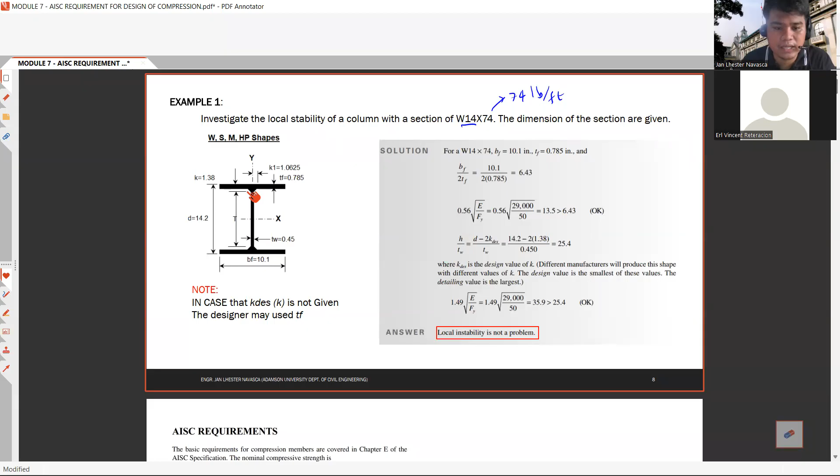Given the dimension of our column, we have a base, the width of the flange to be 10.1, and the total depth of 14.2, thickness of the flange 0.785 inches, and the thickness of the web to be 0.45 inches. And given the fillet K, the fillet distance by the manufacturer, it has 1.38 inches fillet. Fillet is this one, the curve.

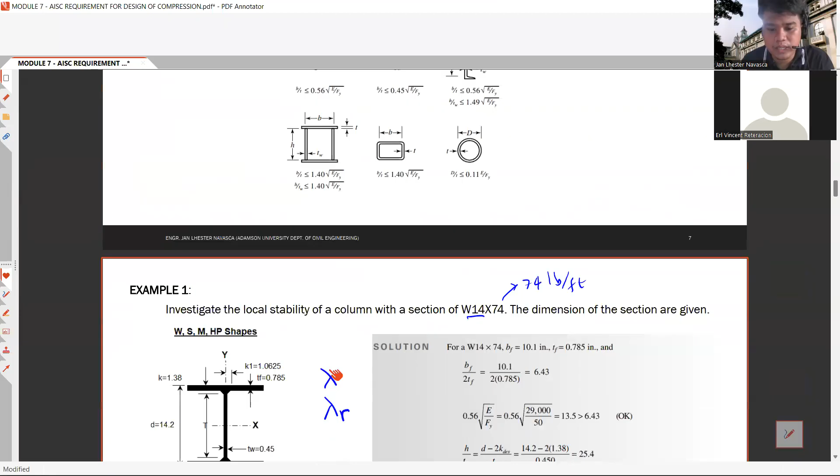So for this type of problem, to investigate if you have local stability of a column, you just need to solve the lambda, or the width to thickness ratio, for the unstiffened and stiffened elements, and the lambda sub r for the stiffened and unstiffened elements. And you will compare that lambda and lambda sub r to come up with your conclusion if you have a slender or non-slender section.

Given we have a W section, or I-beam, we have a summary of the limiting ratio. So we are comparing B over T to 0.56 square root of E over Fy. This is for the unstiffened elements, and for the stiffened elements, H over TW should be less than or equal to 1.49 square root of E over Fy.

So let's plug in all the values. For the W14 by 74 with BF equals 10.1 inches and the flange thickness to be 0.785, according to the formula, that is BF over 2. BF over 2, because this is the total BF and your B is approximately half of that B. This is BF. Therefore, BF over 2 is equals to your B.

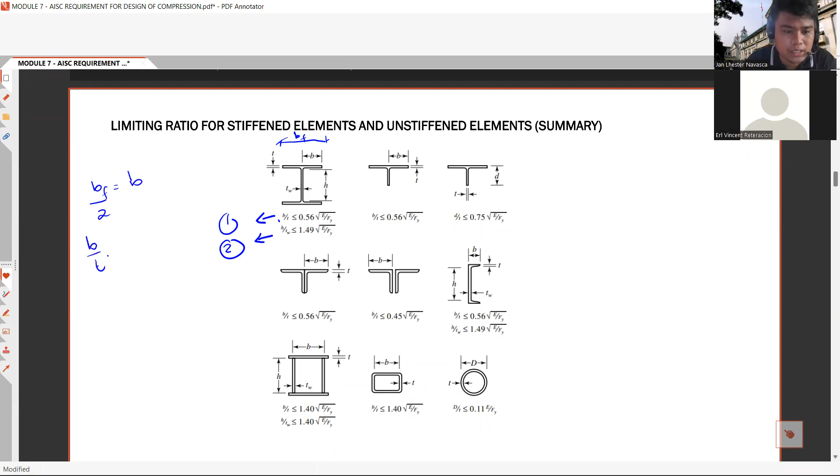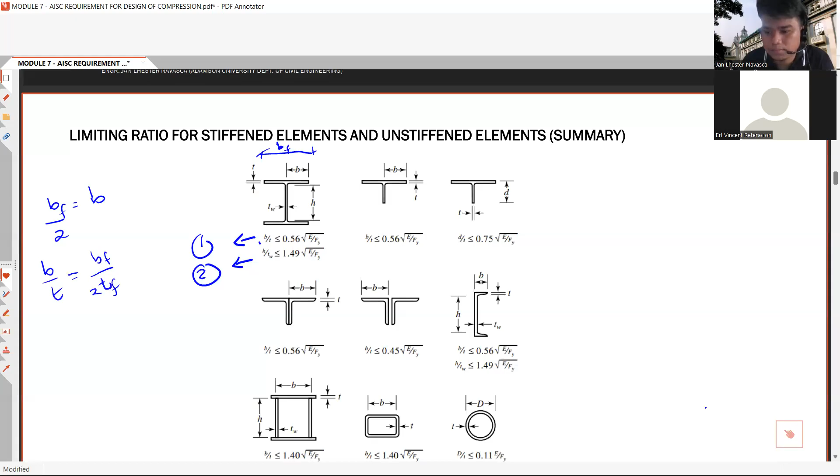Therefore, your B over T is equals to BF over 2 times tF. So we are comparing our width to thickness ratio of BF over 2tF. So just plug in all the values. We have 10.1 over 2 times the flange thickness, we get 6.43.

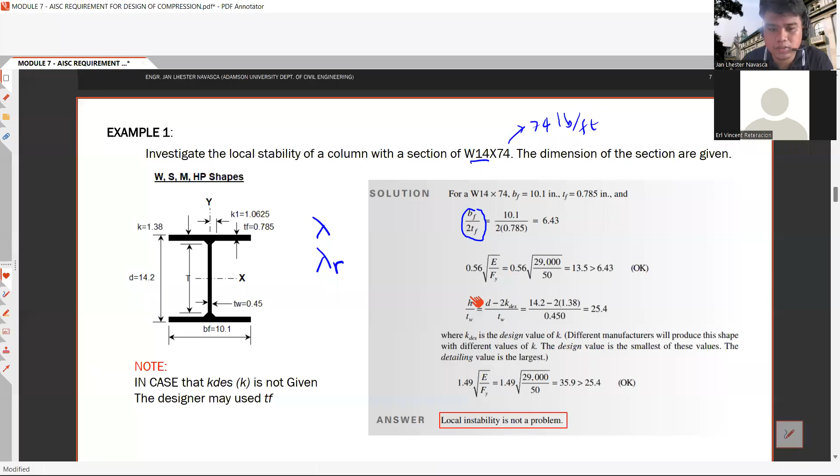Now compare it to the limiting slenderness ratio, the limiting width to thickness ratio, which is 0.56 square root of E over Fy. So solving for 0.56 square root of E over Fy, please memorize the modulus of elasticity of steel in KSI, that is 29,000 KSI.

The problem does not state what Fy to use. The problem is not given the Fy of the column to be used, or the material properties. So let's assume we have the properties, let's say 50 KSI. This is only for this problem, so it's not given.

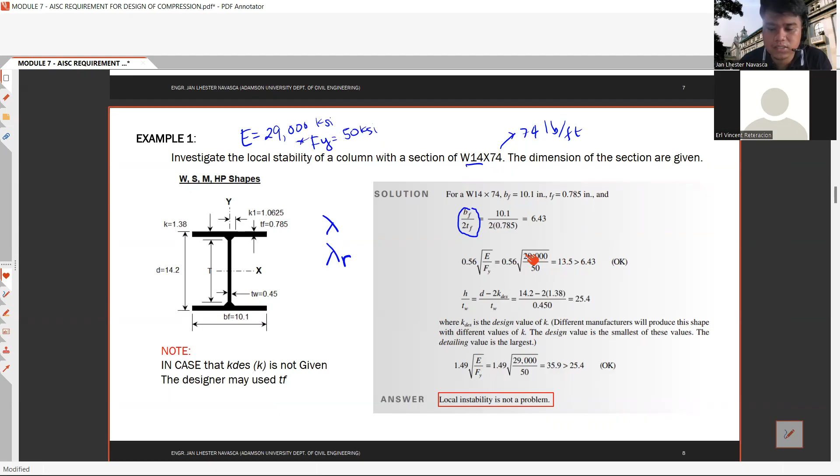Anyway, solving for this limiting width to thickness ratio, we got 13.5, that is square root of 29,000 over 50, that is 13.5. So comparing our limiting width to thickness ratio to the actual width to thickness ratio, that is greater than, meaning that is okay. So therefore, based on the conclusion, we have a non-slender section on the unstiffened element, or on the flange.

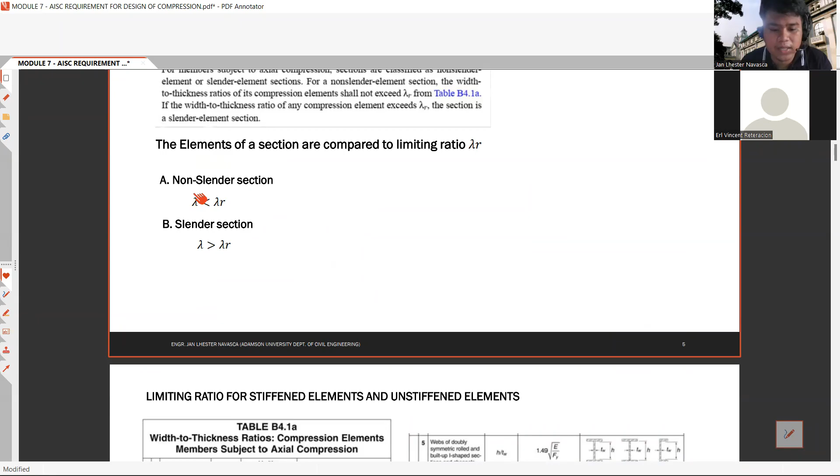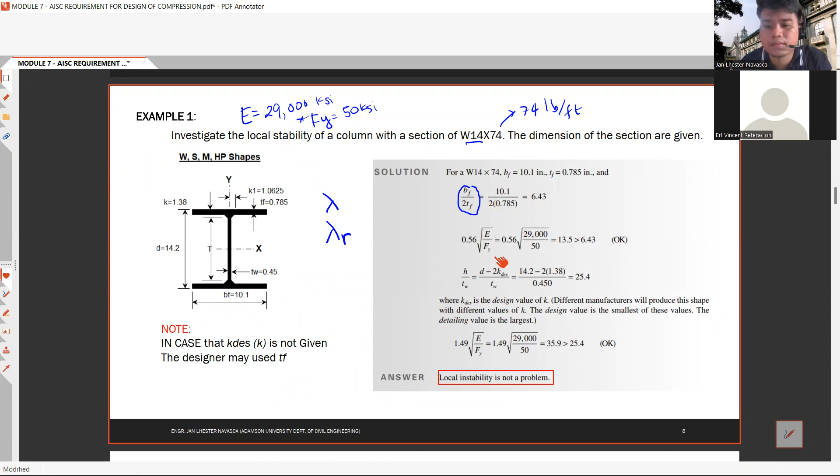And for the case of the stiffened element, for the web. Sorry, this time is for the web, or the stiffened element. So again, let's check the summary.

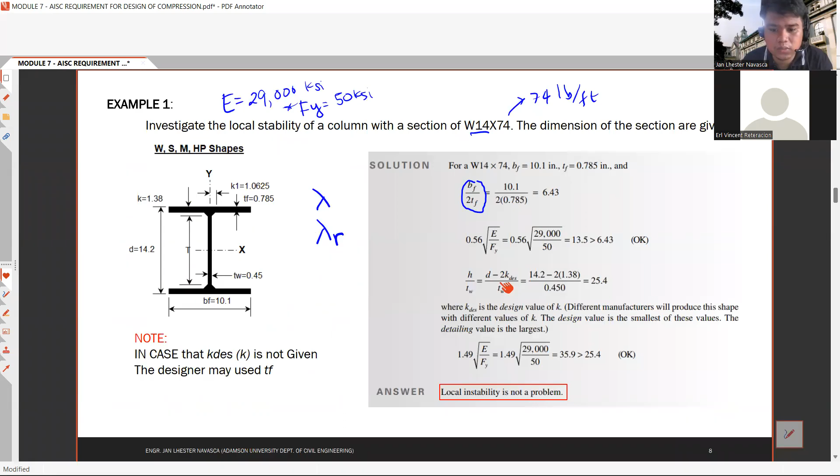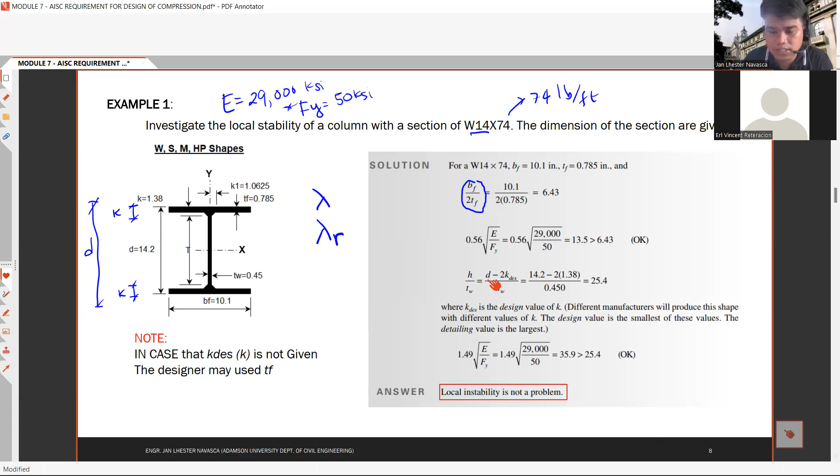According to the summary, your H should be at the end of the fillet. This one, at the end of the fillet, meaning your total depth. To solve for that H, you just need to subtract twice your K design, or the fillet distance. This one, the fillet distance, this is K. You have K here and K also here. Therefore, this is D. Therefore, your H is D minus 2 times K, the fillet distance.

Solving for that, we have 25.4. If the problem does not give the K design value, again, different manufacturers will produce this shape with different values of K. So if K is not given, the designer may use tF. That means you can use H equals D minus 2 times the thickness of the flange, over TW. So if the problem has not given K, use this equation.

Then comparing our width to thickness ratio for the web or for the stiffened elements, solving for the 1.49 square root of E over Fy, we got 35.9. And comparing it to the actual width to thickness ratio, that is greater than, therefore that is okay.

So meaning if your flange or unstiffened element is okay, and for the web you have that is okay, therefore you have no local instability problem, or therefore there is no local buckling that will occur in your column. So that is how you investigate the local stability of a given column.

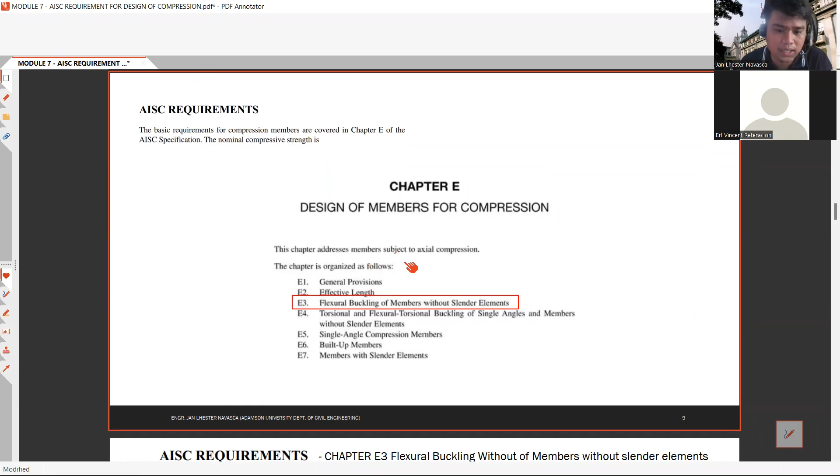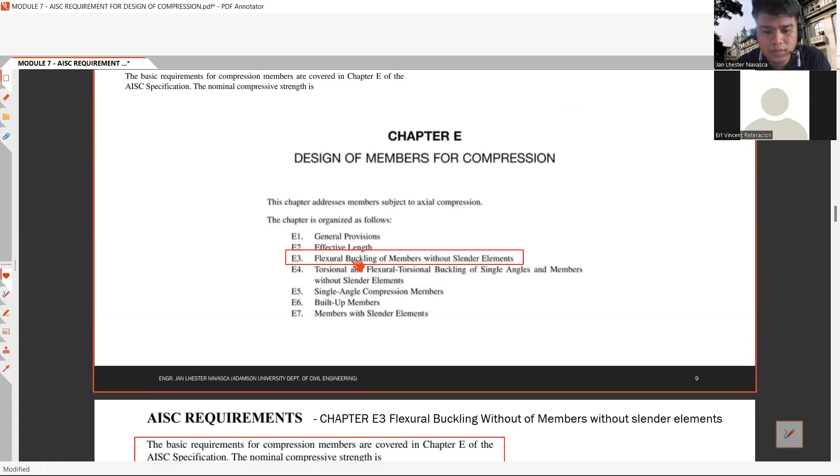So for the AISC requirements, if you check the AISC manual, the basic requirements for compression members are covered in chapter E, design of members for compression. If you check chapter E1 to chapter E7, we have general provisions, effective length, flexural buckling without slender elements, E4, E5, E6, and E7.

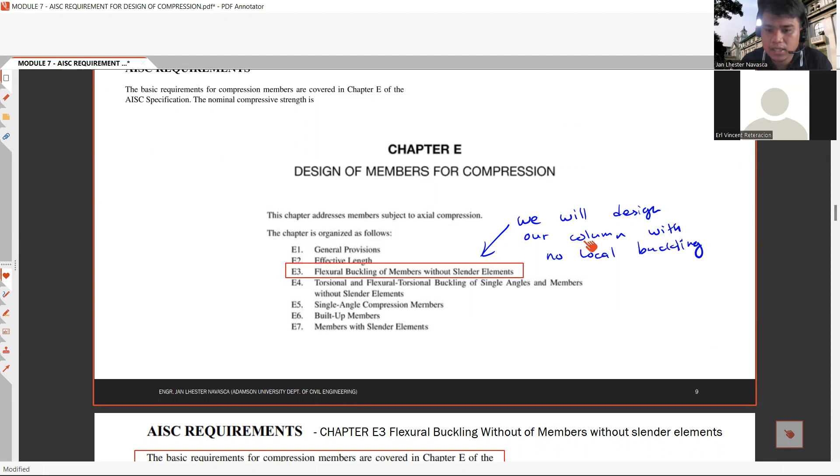Okay, so for the case of our topic now, we will always consider our section to have no slender elements, meaning we will always design our column with no local buckling. So this is our basic assumption for this subject. So therefore we just determine chapter E3, flexural buckling of members without slender elements.

Because if your section, if you chose a section for a column, and the section you picked has slender elements, your section capacity on flexural buckling will decrease. So why would you pick one with slender elements if you can choose a section that has no slender elements, or where there is no local stability problem?

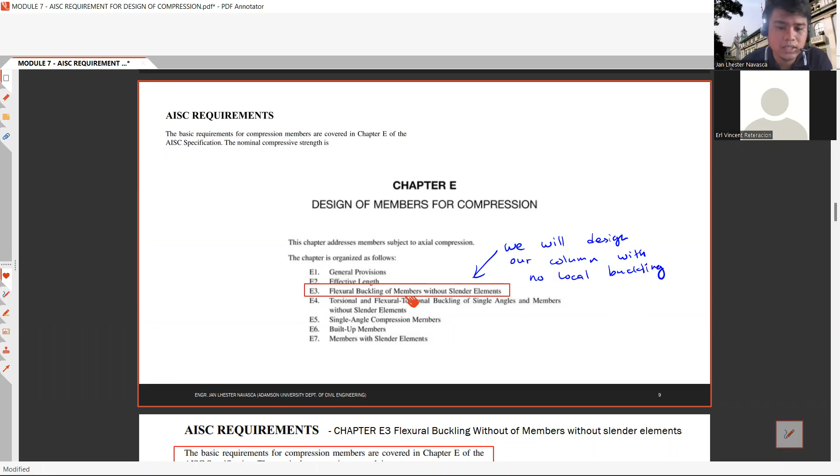So this is the provisions for the section without slender elements. Again, we are only considering flexural buckling. This is the first classification of buckling, or the general buckling. So for the AISC requirements, chapter E3, flexural buckling of members without slender elements.

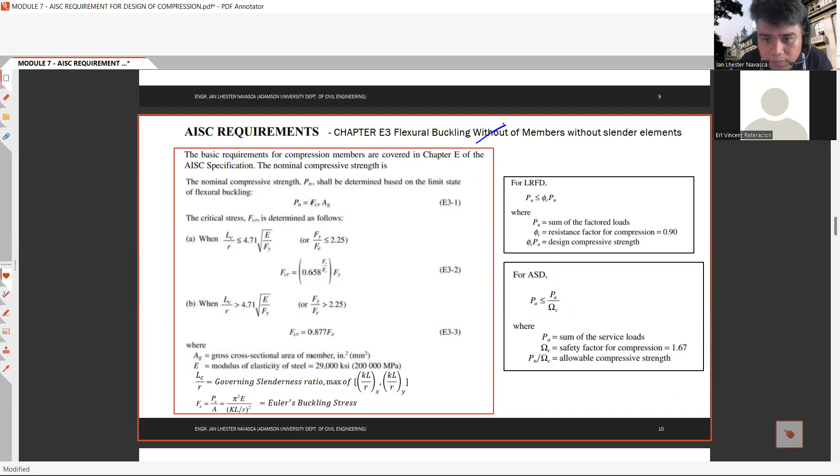It should be buckling of members without slender elements. So the nominal compressive strength Pn shall be determined based on the limit state of flexural buckling, and this equation Pn equals FCR times AG, where your FCR is determined as follows.

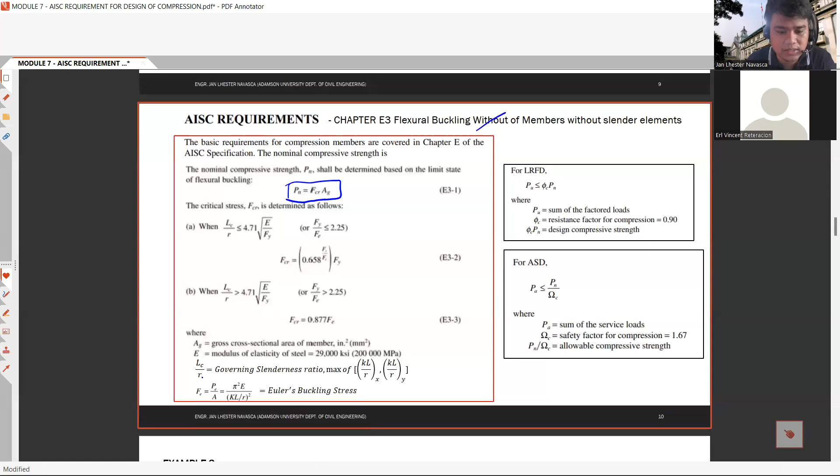Number one, this LC or the governing slenderness ratio, LC over R, different notation. This is LC sub R. LC over R is the governing slenderness ratio or the maximum KL over Rx or KL over Ry, and is less than 4.71 square root of E over Fy.

Your FCR is this one. Then, if your LC over R or the governing slenderness ratio is greater than 4.71 square root of E over Fy, you have this value of FCR.

As I said last meeting, the AISC provisions for designing compression members are based on the assumption of Euler's column. That is why you have this value F sub E. What is that F sub E? That F sub E is the Euler's buckling stress. If you recall the Euler's buckling stress, that is pi squared E over KL over R squared.

Meaning, the AISC requirements now consider the residual stresses. Residual stress is the capability of the steel to carry load even beyond Fy, or beyond the yield limit. So meaning we are designing compression members past the yielding limit state, heading toward the plastic range. So this time your Euler's buckling stress is now included in the formula for FCR.

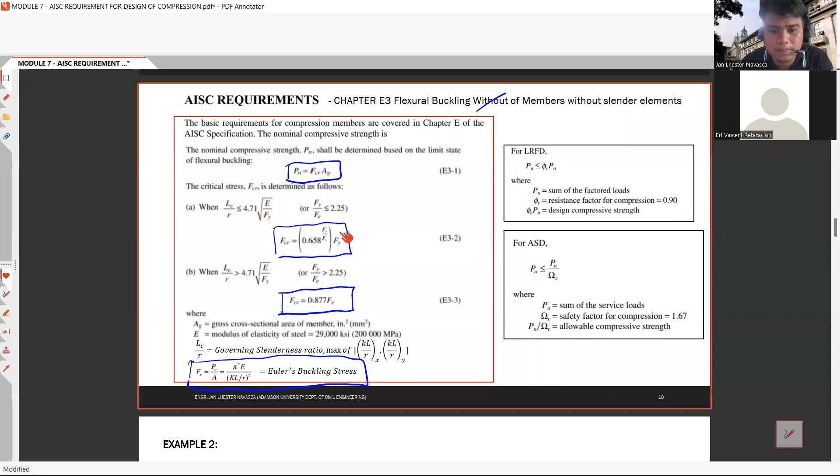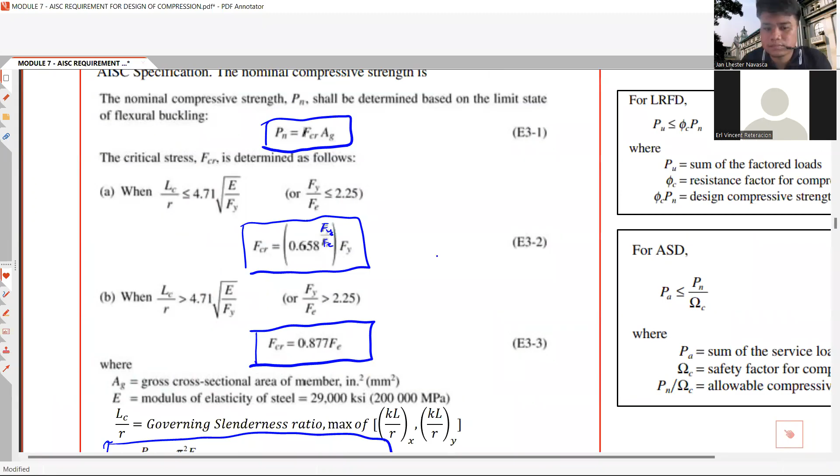Again, this FCR is 0.658 raised to Fy over Fe, multiplied by Fy. This is Fy over Fe. So if that is less than 4.71 square root of E over Fy, you use this; if greater than, you have this 0.877 Fe.

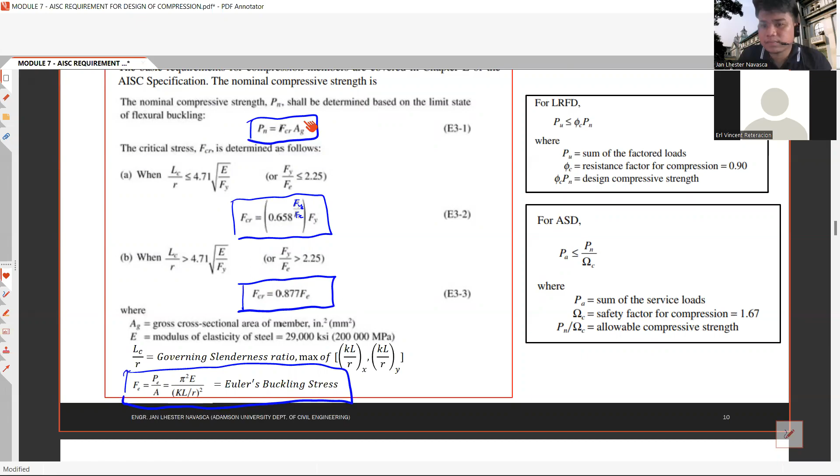Then you multiply that FCR to your gross area, AG, and you will get the nominal compressive strength. So for the design philosophy based on LRFD or ASD, you simply multiply the nominal capacity by a factor: for LRFD, multiply by phi; for ASD, divide by the factor of safety omega.

So for LRFD, the ultimate design compressive strength is phi sub C, Pn, where your phi sub C is the resistance factor for compression, equal to 0.9.

Then for ASD, your safety factor for compression is 1.67. So you will divide that nominal compressive strength by 1.67, and you will get the allowable compressive strength. And that is your capacity, your capacity based on compression.

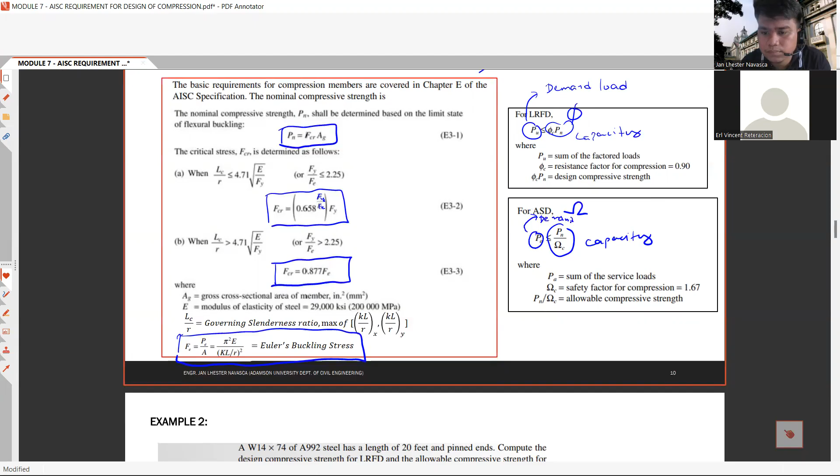Then this one is the demand load, sum of the factored loads, your demand load. So whatever load combination governs, that is your demand load based on the LRFD or ASD load combination.

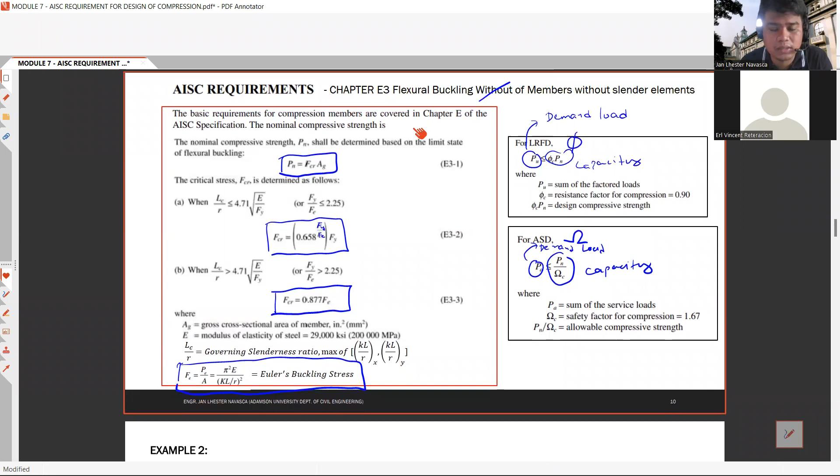So it's very straightforward, this assumption for the AISC requirements for the design of flexural buckling of compression members.

So let's try to solve an example problem. A W14 by 74 of A992 steel has a length of 20 feet.

Your column is pinned at both ends. Compute the design compressive strength for LRFD and the allowable compressive strength for ASD. In other words, we are solving for the capacity of our compression member based on LRFD and based on ASD. Please take note that A992 steel has an Fy of 50 KSI and modulus of elasticity of 29,000 KSI. Given the properties of W14 by 74, the cross-sectional area is 21.8 square inches and radius of gyration on the y-axis is 2.48 inches.

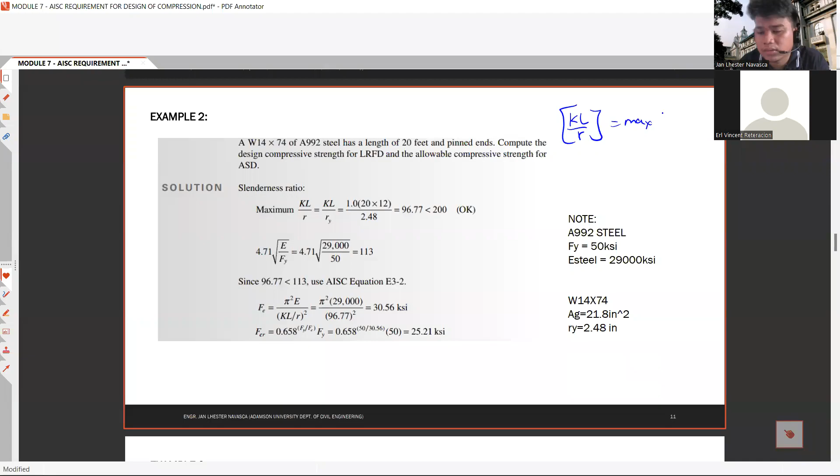Since the governing slenderness ratio KL over R will be compared, it comes from the maximum of KL over Rx and KL over R on the y-axis. This one, KL over R y, on the y-axis.

If you have the same value of K for both, both 1.0. Same value of L, since there's no lateral bracing, that is the same. For X and Y axis, that is 20 feet. So the only thing that will give us a straightforward answer for maximum slenderness ratio is by using the minimum radius of gyration.

Since Ry is lower, the governing slenderness ratio is KL over Ry. So you have K equal to 1.0 since both ends are pinned, and your L is 20 feet, in feet, while Ry is in inches. Therefore you need to convert feet to inches by multiplying by 12. So that is why you have 20 times 12. So 1.0 times 20 times 12 over 2.48 gives you 96.77.

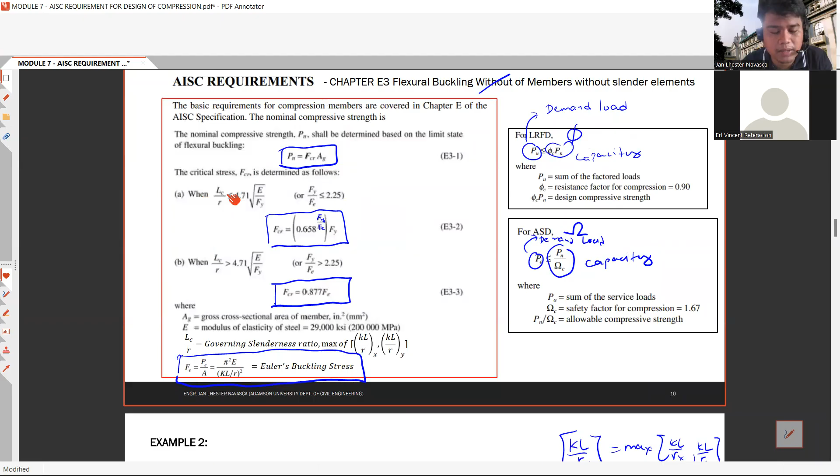Let's use this recommendation, so that is okay. Then based on AISC requirements to solve for the governing flexural buckling strength, you will compare your maximum slenderness ratio to 4.71 square root of E over Fy. Solving for that, 4.71 square root of 29,000 over 50 gives you 113. Now compare 96.77 to 113.

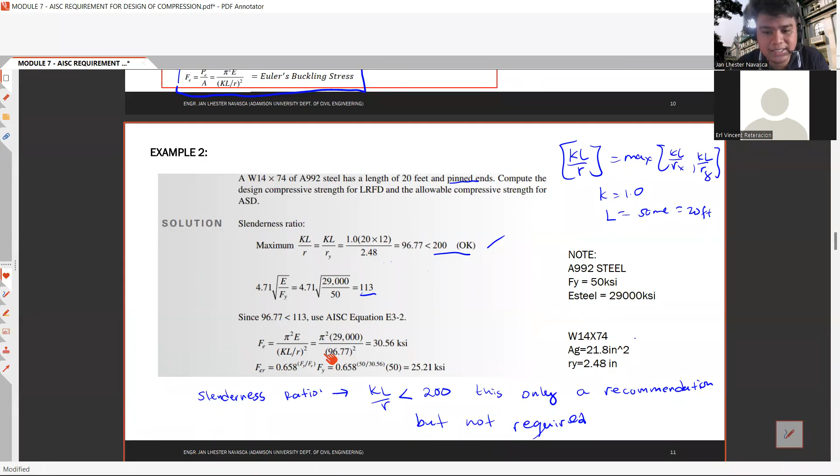Therefore you will use equation E3-2 to solve for FCR. Your FCR equals 0.658 raised to Fy over Fe, multiplied by Fy. To solve for Fe, the Euler's buckling stress, that is pi squared E over KL over R squared, so pi squared times 29,000 over 96.77 squared. You have this Euler's buckling stress to be 30.56 KSI. Now solving for FCR, that is 0.658 raised to Fy over Fe, multiplied by Fy, you get 25.21 KSI. So this time, this is your FCR.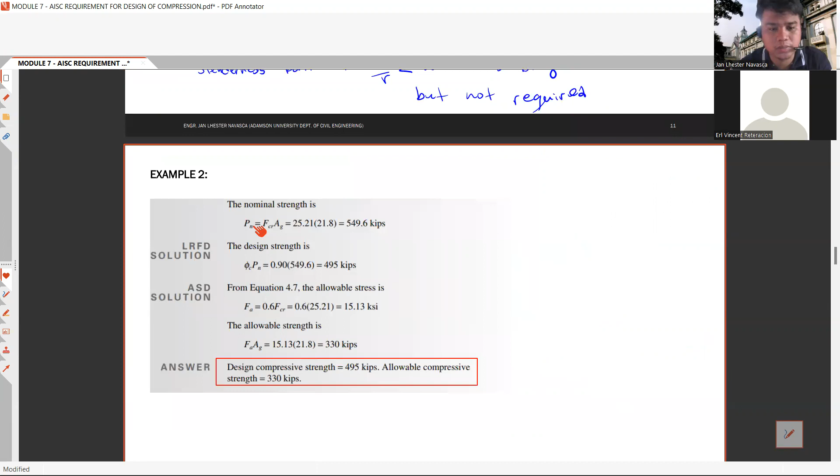You will multiply it by AG to get the nominal compressive strength. So the nominal compressive strength Pn equals FCR times AG. Your FCR is 25.21 and the cross-sectional area of the column is 21.8. Therefore your nominal compressive strength is 549.6 kips.

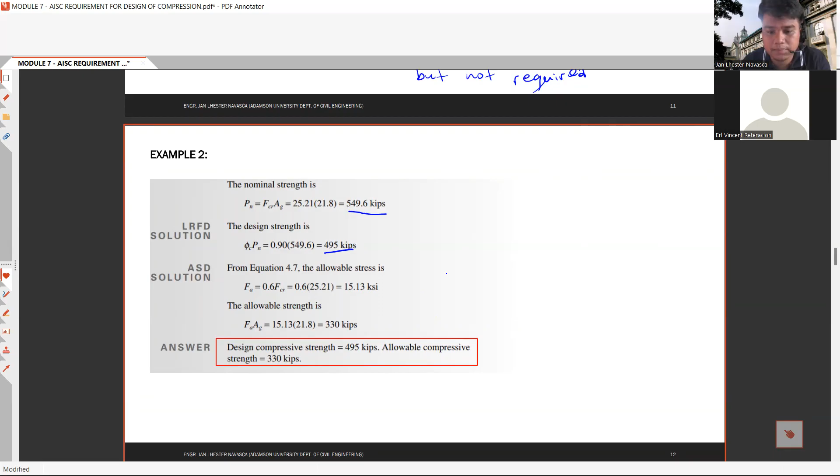The problem is asking for the design strength in LRFD and the allowable strength in ASD. So you multiply this nominal strength by 0.9 to get your design strength in LRFD, giving 495 kips. For the ASD solution, according to the provisions, you divide your nominal compressive strength by the factor of safety for compression, 1.67. P sub A equals P sub N over omega, where omega corresponds to dividing by 1.67. So solve for 1 over 1.67 to get your P sub A.

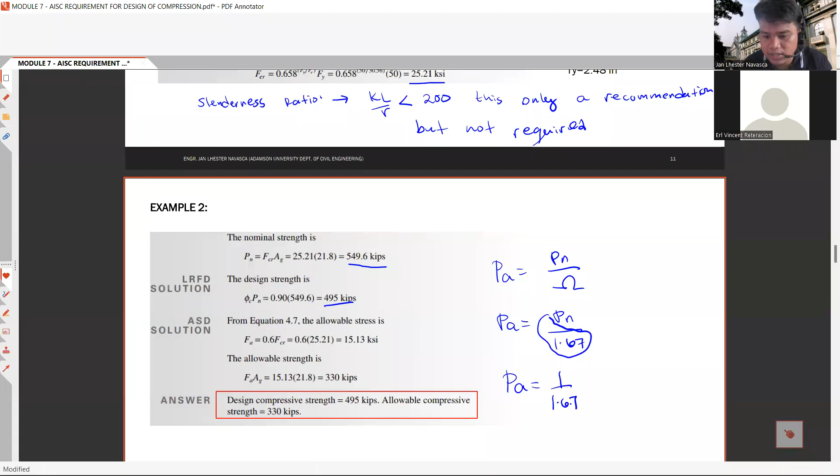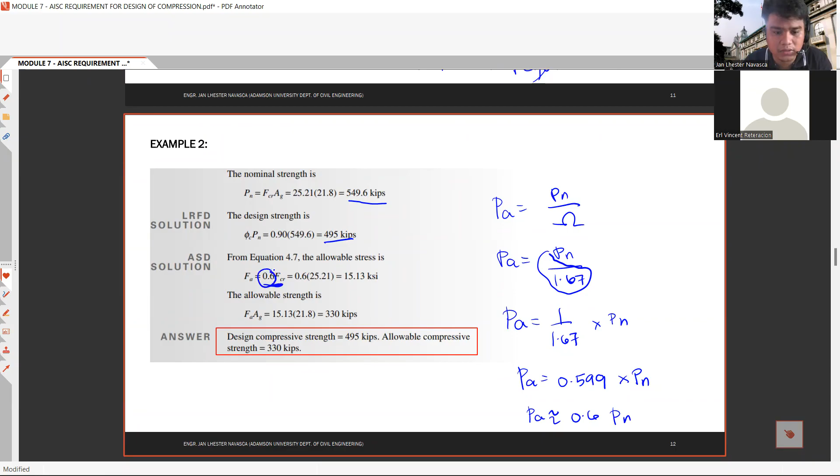So that equals 1 over 1.67 times P sub n. Solving for 1 over 1.67, you have 0.598, 0.599 to be exact, multiplied by P sub n. So that is approximately 0.6 P sub n. That is why some books use this 0.6 factor, instead of dividing by 1.67.

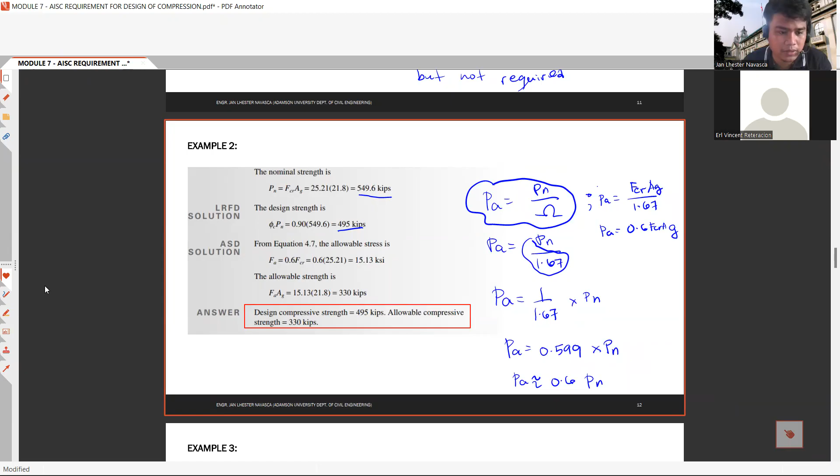So to solve for the allowable stress or allowable strength, you can multiply your F sub A to be 0.6 FCR. You have this 15.13 KSI, and the allowable strength is 330 kips. Or use this equation: P sub A equals P sub n, which is FCR times Ag divided by 1.67, you will also come up to 0.6 FCR Ag. So you can use this one, or you can use this one. They're still the same.

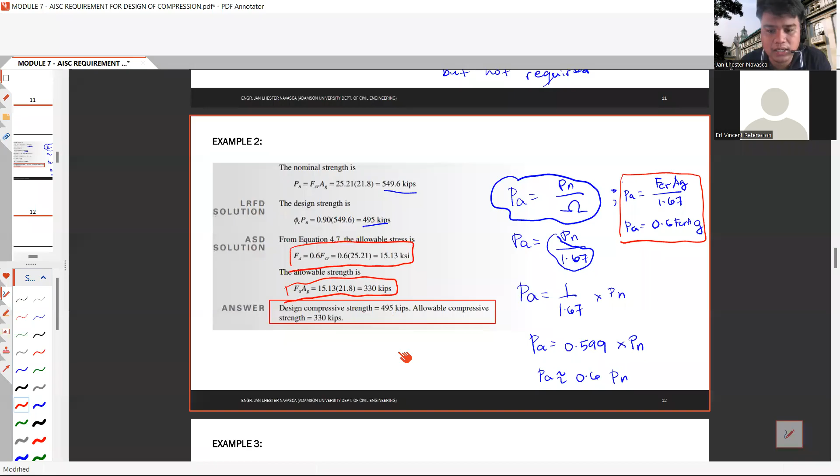So the answer is the design compressive strength in LRFD is 495 kips, and the allowable compressive strength is 330 kips. So that is the flow of solving the capacity of our column based on ASD and LRFD. So, another problem.

Using AISC equation E3-2 or E3-3, we will first determine which equation governs, whether it is E3-2 or E3-3, and determine the nominal axial compressive strength for the following cases: number 1, where L equals 15 feet, and number 2, if L is 20 feet. Note that we are also using A992 steel with Fy equal to 50 KSI, and modulus of elasticity of steel to be 29,000 KSI. The properties of W10 by 33: Ag is 9.71, and R sub Y, the radius of gyration in Y, is 1.94 inches.

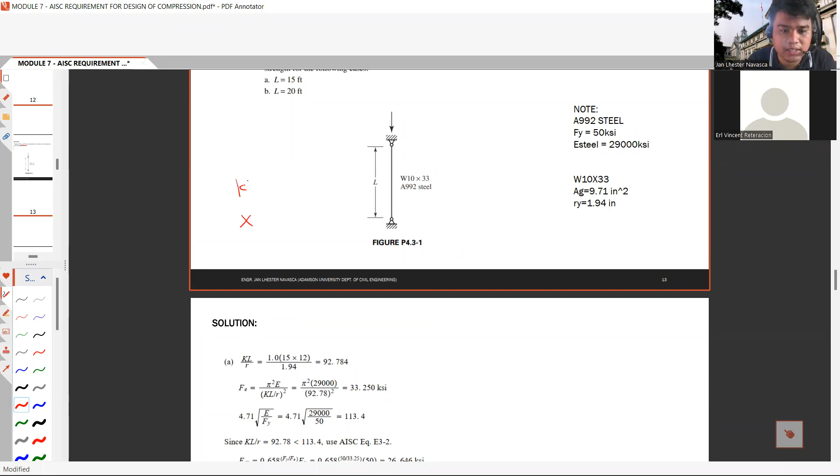Let's try this. For KL over R, the governing slenderness ratio, since you have no lateral stability, in the x-axis your K and L, and in the y-axis your K and L, are the same. Therefore, the only factor in slenderness ratio is based on radius of gyration. So the governing slenderness ratio is KL over Ry in the y-axis. Therefore, your governing slenderness ratio is 1.0 times 15 times 12 over 1.94. Again, your 1.94 is in inches, therefore your L should be in inches, that is why you have this conversion of feet to inches. Then your governing slenderness ratio is 92.784.

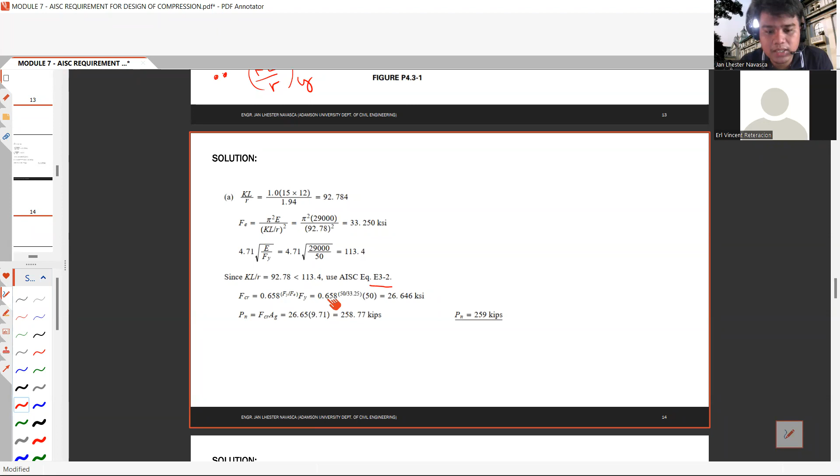Solving for F sub E, let's also solve the Euler's buckling stress: pi squared E over KL over R squared, you have this 33.25 KSI Euler's buckling stress. So now we compare it to 4.71 square root of E over Fy, that is 4.71 square root of 29,000 over 50, you have this 113.4. Since your KL over R, which is 92.78, is less than your 4.71 square root of E over Fy, which is 113.4, therefore we will use equation E3-2 again, since your KL over R is less. So solving for equation E3-2, your FCR is 0.658 raised to Fy over Fe, times Fy. Therefore your FCR is 26.646 KSI.

And solving for the nominal strength, which is P sub n equals FCR times Ag, you have 26.65 times 9.71, which is your Ag, you have this 258.77 kips. So the problem is using whole numbers, so rounding up to a whole number, you have this 259 kips.

Next problem, what if your L is 20 feet? So if our L, which is 20 feet, solving for KL over R again, that's the governing slenderness ratio, you have 123.71. Therefore, your F sub E now will be equal to 18.705 KSI, the Euler's buckling stress, and compare it now to 4.71 square root of E over Fy, you have 113.4. Since our KL over R is greater than the limiting slenderness ratio, which is 4.71 square root of E over Fy, therefore for this length of 20 feet, the capacity is based on equation E3-3 this time, this is what governs.

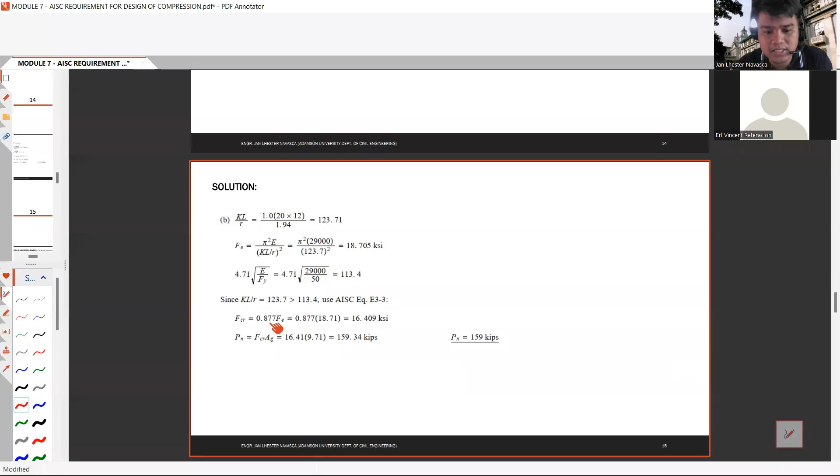According to the problem, your F sub CR or FCR is equal to 0.877 F sub E. So 0.877 multiplied by F sub E, you have 16.409 KSI. Then solving for the nominal strength, you have this 159.34 kips, or that is equivalent to 159 kips.

So what can you say about these two different lengths? Meaning if we increase the length of our column, it doesn't mean that the capacity will also increase. That's not the case, they are inversely proportional. When you increase the length, your column becomes susceptible to buckling, to flexural buckling, meaning its capacity decreases.

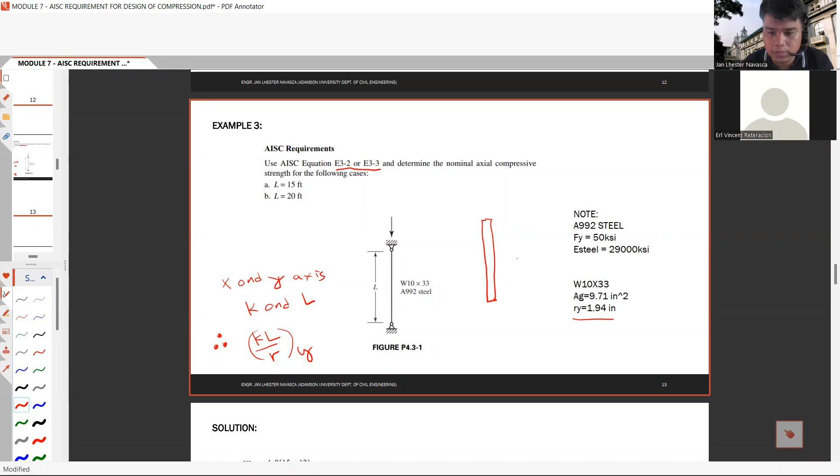Again, if you have a ruler, compare a very long and slender ruler to a ruler that is wide and short. If you apply an axial load, it is easier to buckle the column with a long and slender element, this one, compared to this one. You cannot buckle it easily. So this one is higher compared to this one.

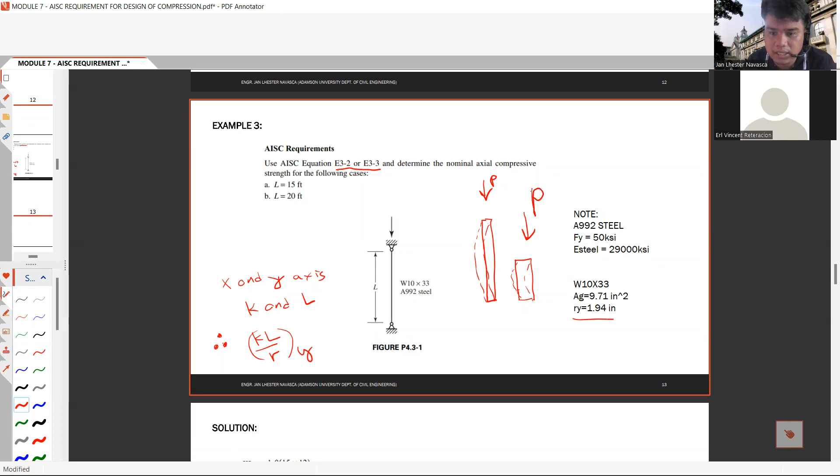Dapat baliktad, it should be this one. Mas maliit lang yung compressive strength, and this time, mas malaki yung compressive strength na kaya mong i-apply. Okay, so that is also the case given by this example problem.

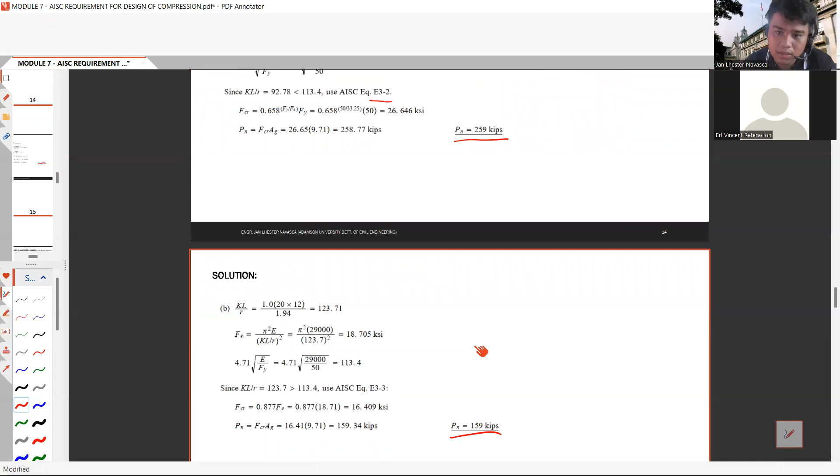So when our L is 15 feet, the nominal capacity is 259 kips. When our L is increased by approximately 30%, which is 20 feet, your capacity will now be 159 kips. So 159 divided by 259, nag-decrease yung capacity natin by 40%.

Okay, imagine, nagdagdag ka lang ng 5 feet. 5 feet is approximately 1.5 meters. So nagdagdag ka ng 1.5 meters on your column, and the capacity of your column is decreased by 40%.

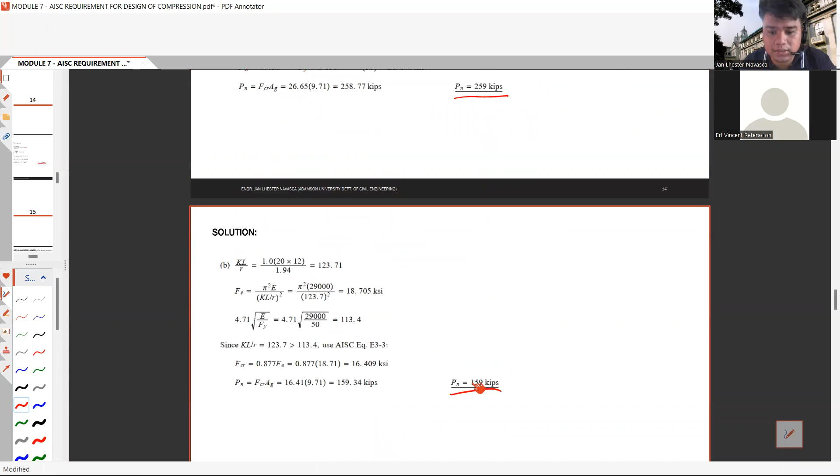Okay, so we also have these AISC tables for design of compression member. If you check your AISC manual and find table 4, the AISC tables for the design of compression members, the manual contains many useful tables for analysis and design. So for compression member whose strength is governed by flexural buckling, that is not local buckling, table 4-22 in part 4 of the manual, design of compression members, can be used.

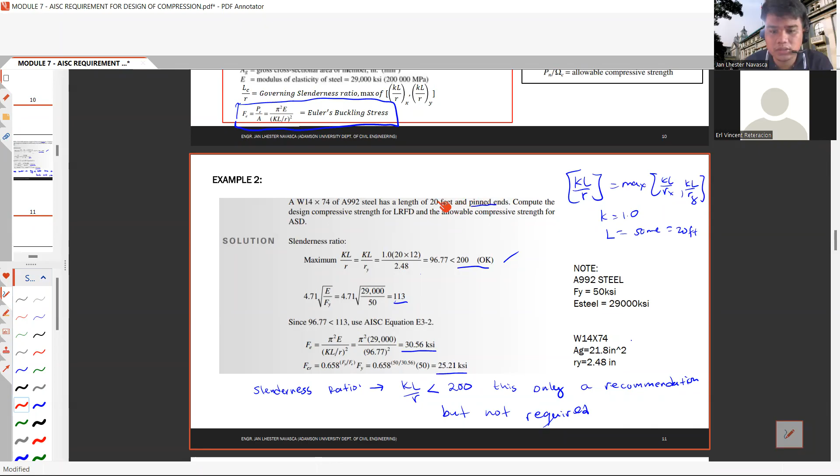Recall in our example 2, your W14 by 74 having an Fy and effective length of 20 feet. Puntahan natin yung example 2. So given dun sa example 2, your K times L is equals to 1.0 times 20. That is their effective length. So therefore your effective length is 20 feet.

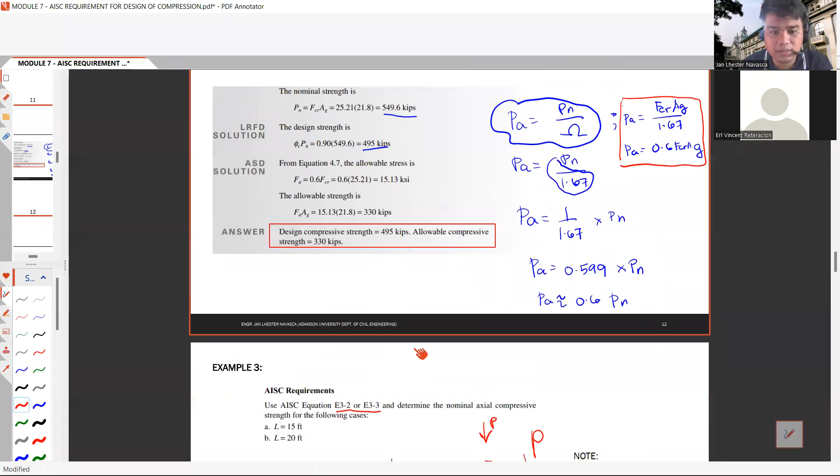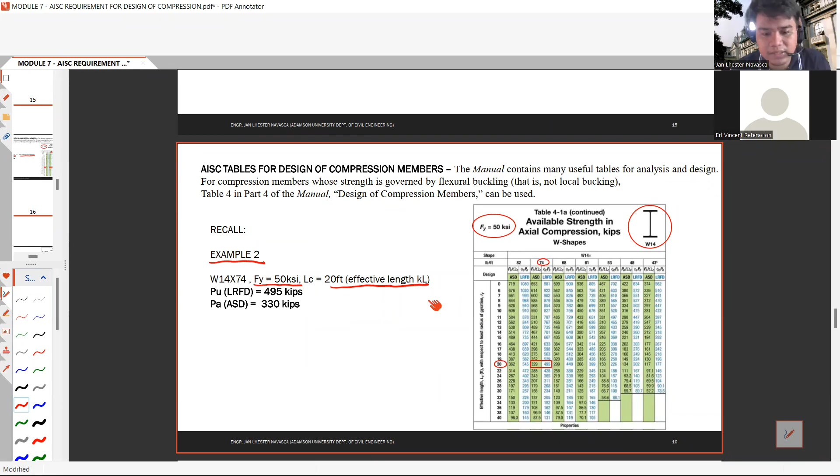Yung na-solve nating solution is 495 kips based on LRFD and 330 kips based on ASD. Okay, so if you check your manual and find the capacity of that W14 by 74 having an Fy of 50 KSI and effective length of 20 feet in table 4 in part 4 of the manual, just find this W14, hanapin nyo siya. Then hanapin nyo kung ano yung linear weight. So our column is 14 by 74, which is this one.

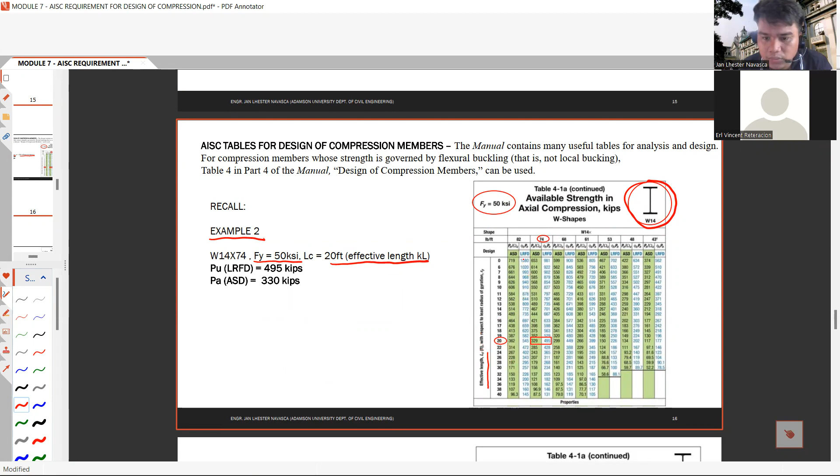Then what is the Fy of your steel or of your material to be used? Your Fy is 50 KSI, this one. And the effective length is 20 feet, which is this one. Okay, so intersecting this effective length L sub C to your shape, we get this Pn over omega sub C for ASD, and this one is for LRFD.

So comparing the answers, we have 329 and 495, which is approximately the same to what we computed in our example. That is 330 and 495.

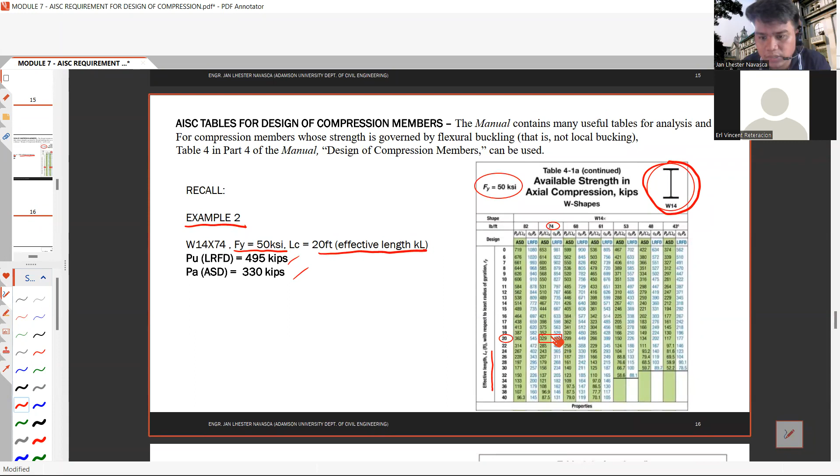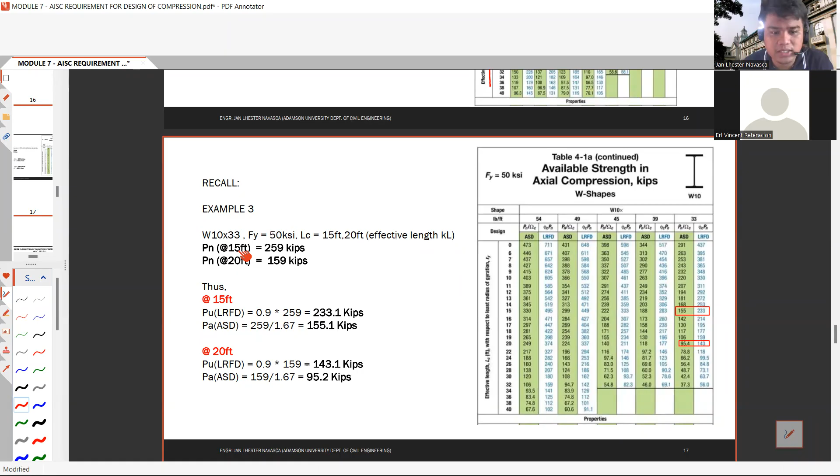Okay, again for example 3, W10 by 33 with Fy equals to 50 KSI and L sub C is 15 feet and 20 feet. For Pn at 15 feet, you have this 259 kips, and your Pn at 20 feet, that is 159 kips. Thus, at 15 feet, based on LRFD, you have this 233.1 kips, and based on ASD, you have this 155.1 kips. And for 20 feet, you have 0.9 times 159, which is 143.1 kips on LRFD and 95.2 kips on ASD.

Now checking this W10 by 33 with Fy equals to 50 KSI, you have this 155 kips based on ASD and 233.1 kips based on LRFD. So ito yung effective length, this is the effective length.

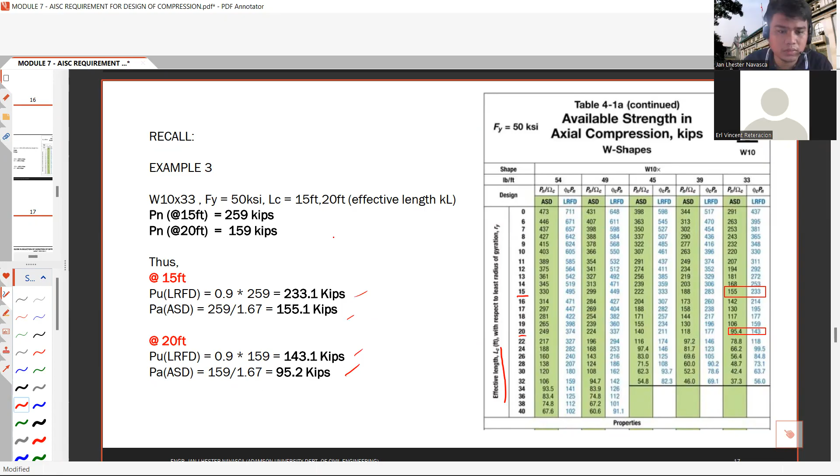Then for 20 feet, which is this one, you have this 95.4 and 143, which is approximately the same as what we computed in example 3.

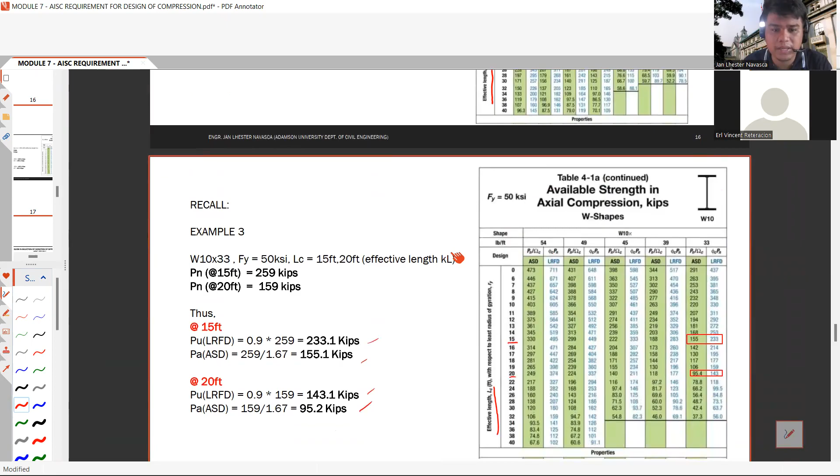So pwede kayong mag-solve based on manual computation or based on this available strength table, if you find your effective length K sub L and the materials and the dimensions of your compression members. Ang hahanapin lang talaga natin dito is this one, ito lang yung inputs natin, ang inputs natin is Fy, this one, and the shapes o yung ano natin.

Okay, so those are our inputs. So in addition, for the user guide in selection of capacities of different steel sections, if in the future you will be a structural engineer, this is a user guide given by the AISC.

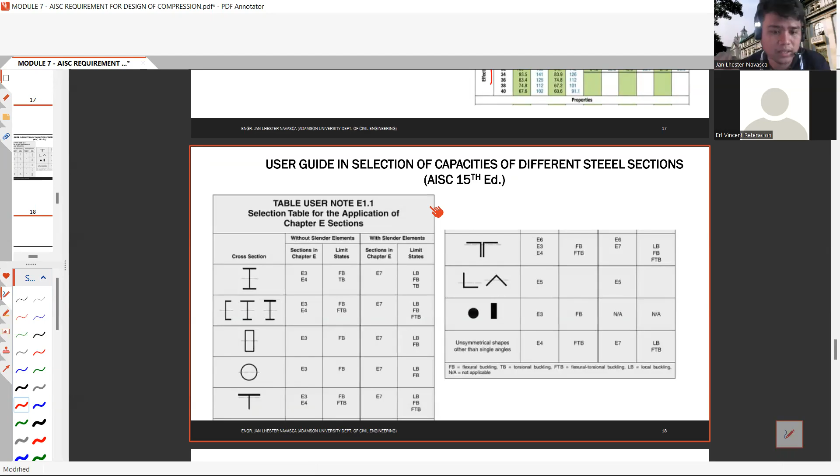If your cross section is wide flange or I-beam, symmetrical on both axes, doubly symmetric on X and Y, your sections in chapter E, if your cross section has no slender elements, the sections in chapter E to be considered are chapter E3 and chapter E4. The limit state is flexural buckling and torsional buckling.

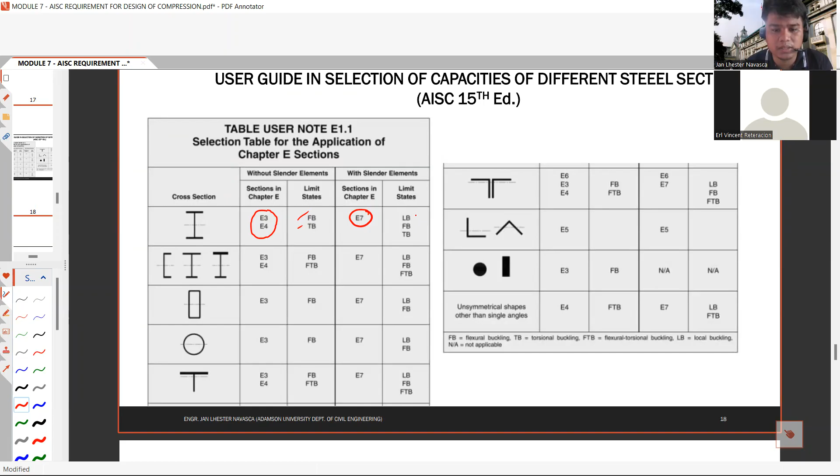Then if your column has slender elements, your sections in chapter E will be based from chapter E7. Then your limit state will now be local buckling, flexural buckling, and torsional buckling.

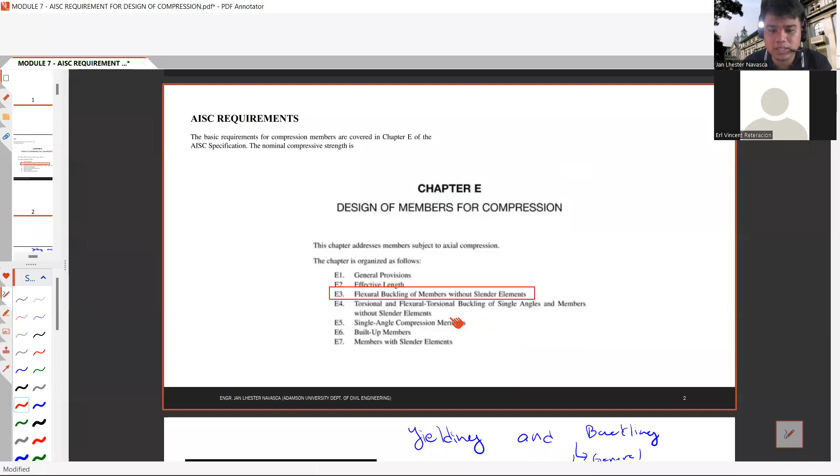So this time, this is the one we focus on: I-beam without slender elements, chapter E3. And chapter E4, if you recall, is the torsional and flexural-torsional buckling of single angle and members without slender elements.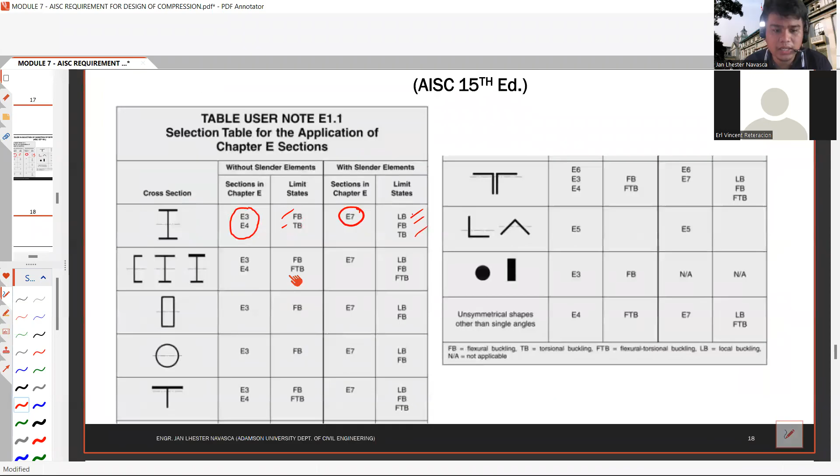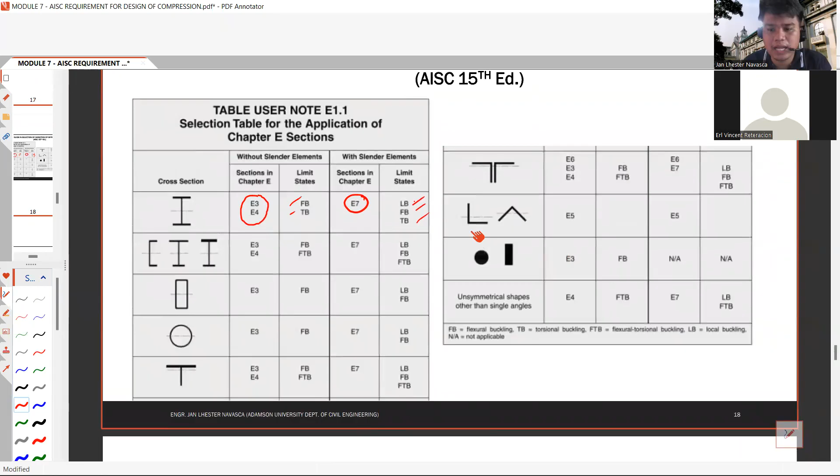For the case if you have a C-section, or non-symmetric I-beam, if you have no slender elements, you have this one, and the limit state is this one. The same for HSS, round hollow steel section, WT, double angle, this one.

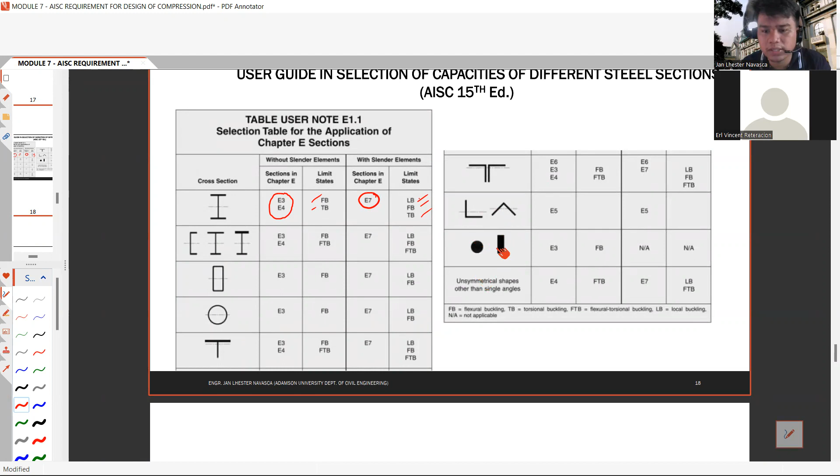For single angles, chapter E5, round bar, solid round bar, and solid flat bar, and any other unsymmetrical shapes other than these single angles. This is the user guide for designing compression members.

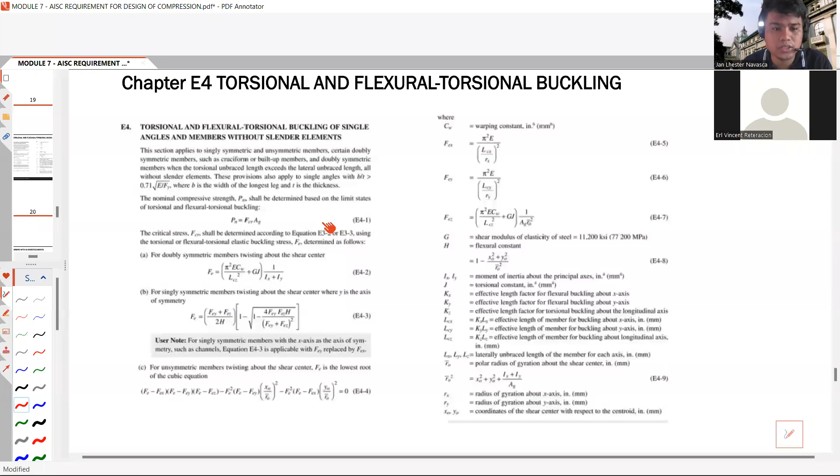So other miscellaneous topics, if you want to further understand or review the designing of compression members, you can check chapter E4. This chapter is torsional and flexural torsional buckling - torsional and flexural-torsional buckling of single angles and members without slender elements. This time we are considering torsional buckling combined with flexural buckling on your compression members. So this happens for single angles.

Since you have torsion, the shear center of a single angle is not located at the actual point of load application, so there's an eccentricity. That's why there is this torsional buckling. This is just a miscellaneous topic and is not included in our discussion.

For chapter E7, members with slender elements. This time, if you are considering slender elements, the slender elements will reduce the capacity of your member, through local buckling. Because if your column or cross section has, let's say, local buckling...

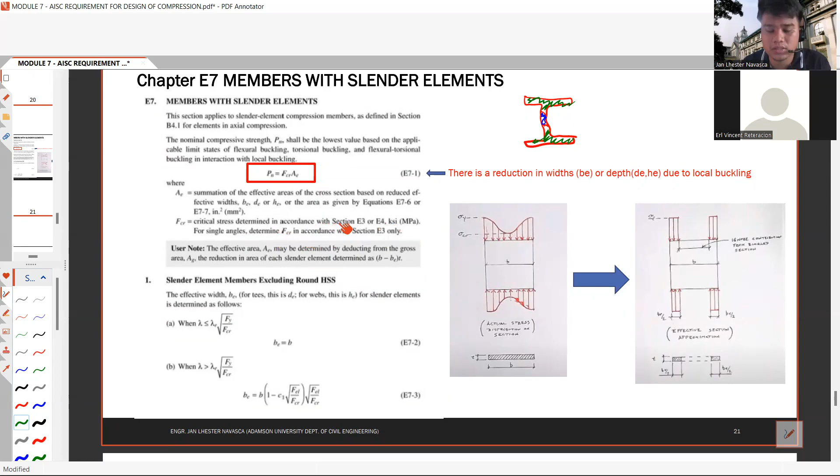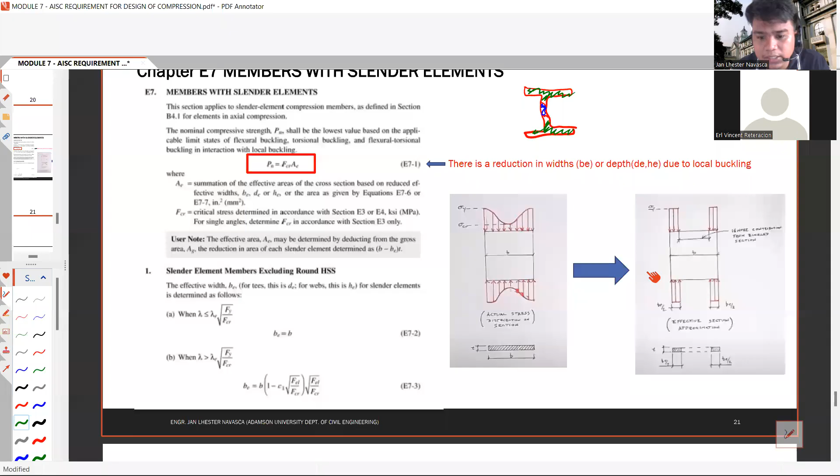So you'll notice, class, this time, suppose you have local buckling. The actual stress distribution of your element is this one. Then since you have buckling, you use the effective section instead.

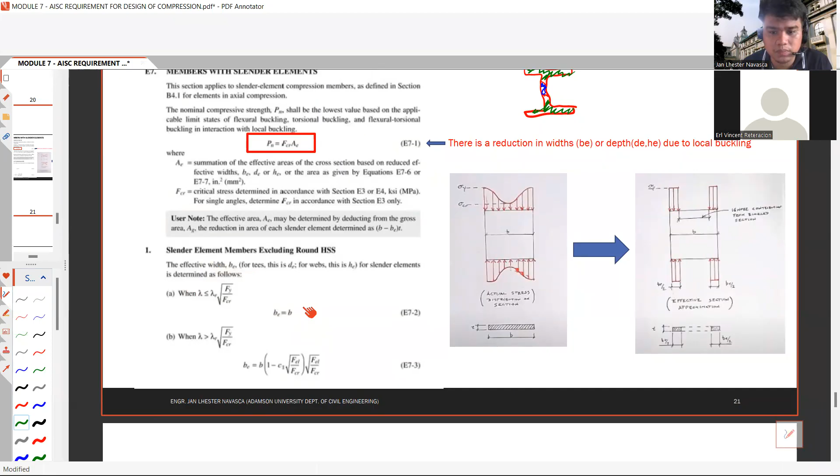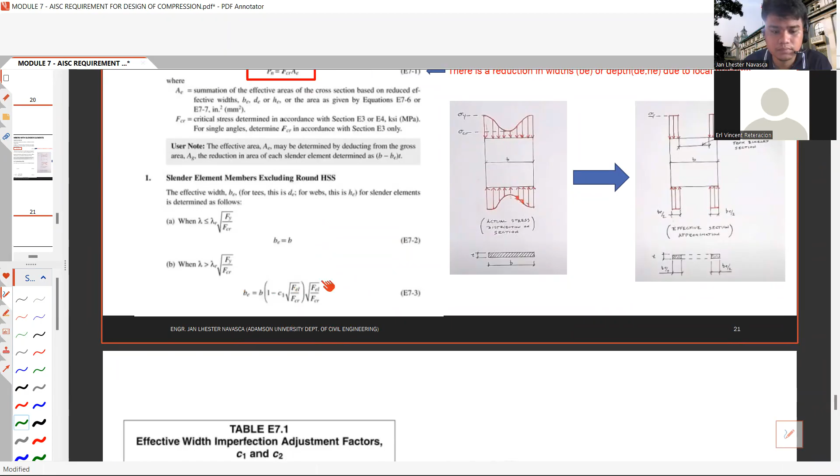So for slender elements in members excluding round HSS, you have this equation. Your B sub E will now be reduced to B when your lambda is less than or equal to lambda sub R, square root of Fy over FCR, you have this B sub E. The effective width imperfection and adjustment factor is equal to C sub 1 and C sub 2 - you have these values. This one is for round HSS.

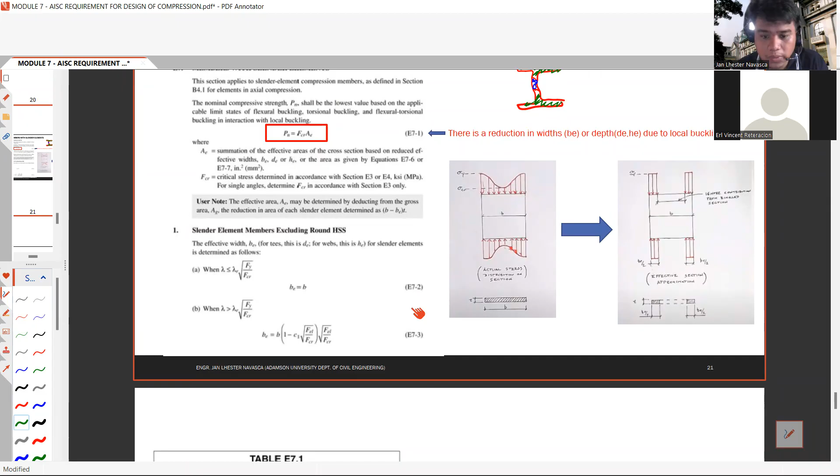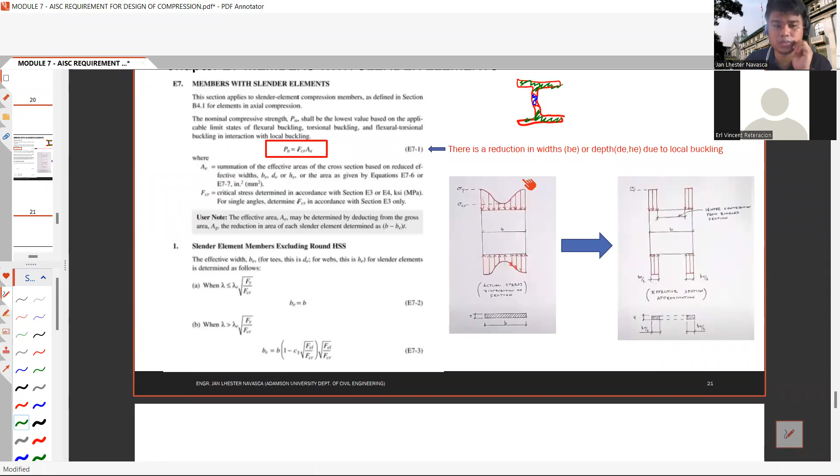So this effective width B sub E - the width of your flanges or the depth of your web is reduced if you have slender elements, due to the reduction from slender elements and local buckling.

Okay, so do you have any questions, class? Any questions? None at all.

So for the reference of our discussion, you can check this AISC manual, the NSCP 2015, Steel Design by Segui, and some lecture notes from my former professor, Dr. Jaime Hernandez. For practice problems, if you find this book, still by Segui, you can check those problems there so you can get an idea how to solve for compression members.